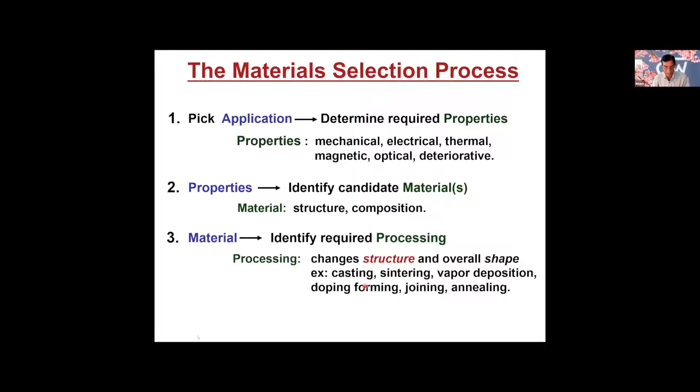One of the main features of the LENR experiment is that it depends on both the composition and the structure. But another interesting part of it is that the composition and structure may change during loading. So moving forward, we are going to introduce the fundamental concepts in material science. Again, it is a fairly large subject, so I don't envision going into all the details.

So looking at imperfection first. There is no such thing as a perfect crystal. What are these imperfections? Why are they important? Because many of the important properties of materials are due to the presence of imperfections. Defects may be desirable or undesirable. For example, dislocations may be good or bad, depending on whether plastic deformation is desirable or not.

Now I'm going to talk about different types of defects. You have defects of zero dimension, one dimension, which is dislocation, and then two dimension and three dimension. In zero dimension, we have vacancies, interstitials, substitutional. Then one dimension is dislocation. Then in two dimension we have grain boundaries or interfaces. Then in three dimension, we have voids, cracks, and inclusions.

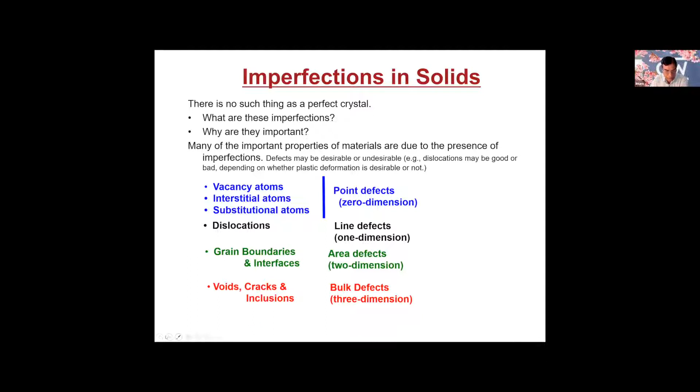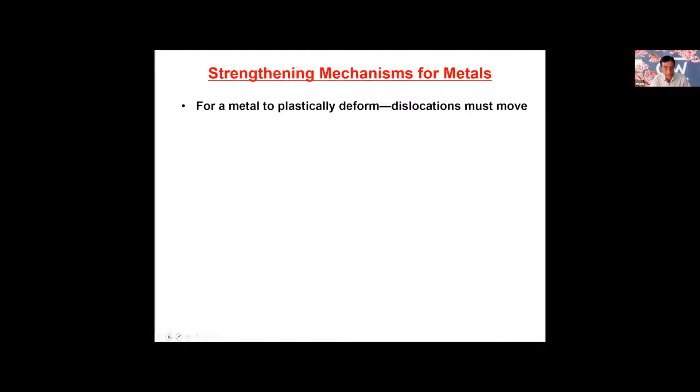Moving forward, let's talk about the different ways we can make the material stronger. Again, these are the fundamentals I'm going to touch base on, which may be useful down the road to make a selection of the material. For a metal to plastically deform, dislocations must move. That's the basic principle. So strength and hardness are related to the mobility of the dislocations. If you reduce the mobility, the metal becomes stronger or hardens, because a greater force is necessary to cause dislocations to move. And if you increase the dislocation mobility, the metal becomes weaker.

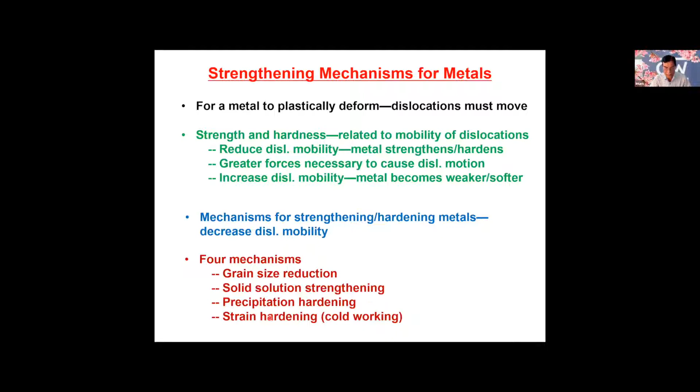And there are different ways you can increase the strength of the material: by reducing the grain size, by solid solution strengthening, precipitation hardening, and strain hardening. These are the different ways, and I'm not going to go into details of those.

So just giving you a rough idea where the diffusion will be faster and slower. If the structure is an open structure, it will be faster. Materials with secondary bonding, smaller diffusing atoms, low density, these make diffusion faster, and just the opposite to that will make diffusion slower.

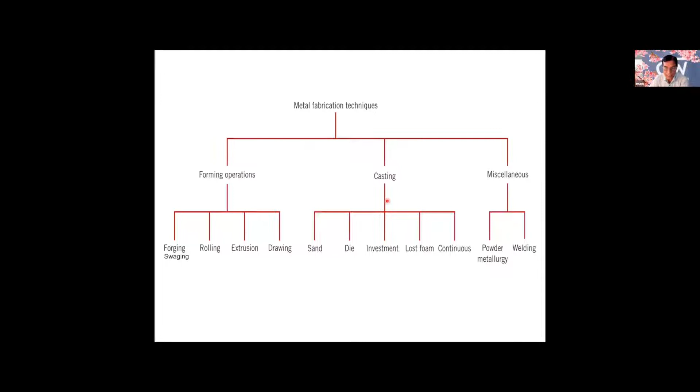Moving forward, these are the different ways by which metal can be fabricated. One is called forming operations, casting, and miscellaneous. And again, there are different categories of that, and I will touch base on some of them. So here are the different types of forming techniques. Here you have forging and swaging. This is rolling, this is extrusion and drawing. And again, each has its own properties to deal with once you go through the forming.

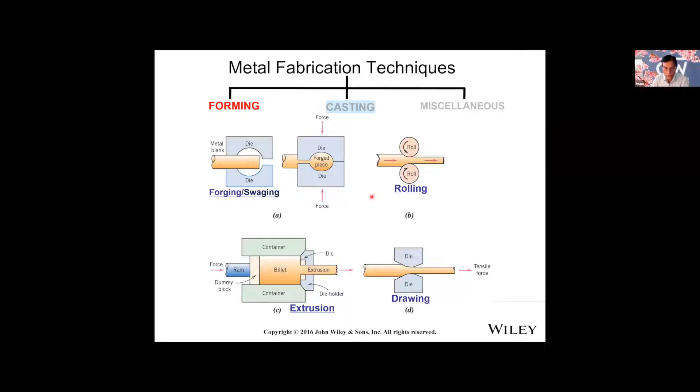Now, one thing I will mention is casting. So moving forward, in casting, it's interesting that casting is normally done by molten metal filled in a mold. So metal is melted in a furnace, perhaps alloying elements added, then cast into a mold. It is common and inexpensive. It gives good production of shapes. It's a weaker product. There are a lot of internal defects, and it's a good option for brittle materials. So normally you adopt it when the material is brittle.

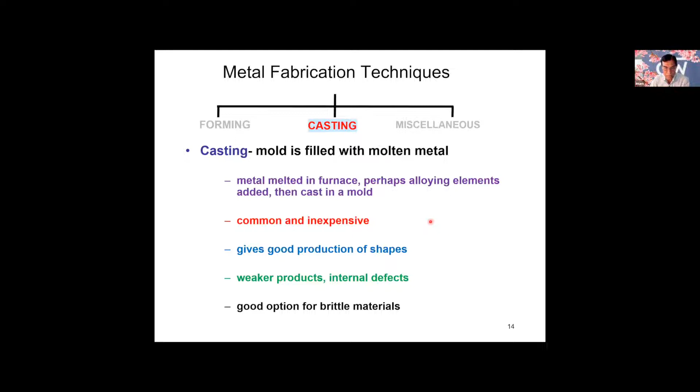But one thing is very interesting: when you do the casting, you cannot do further processing. The cast material is itself in equilibrium, and it doesn't want to change the structure. If you want to change the structure, then you have to do some forming, like we discussed before.

And then talking about the miscellaneous part of it, which is powder metallurgy and welding. So welding is very close to the structure which you get in casting. And powder metallurgy, again, is a fairly large subject, and I'm not going to go into details of that. And some of the aspects of powder metallurgy have been dealt with in our US patent, which was just issued last month.

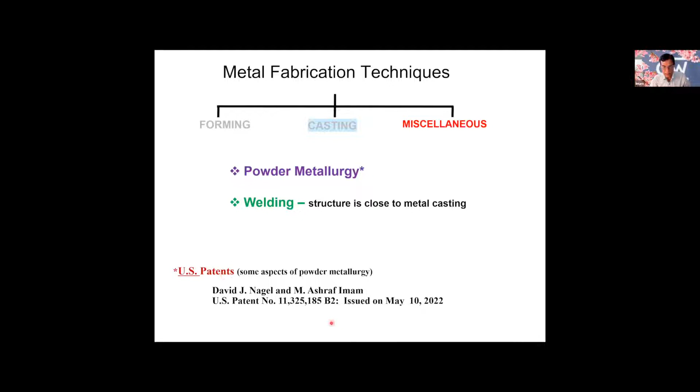So here are some of the characteristics or examples of structure, property, and processing. So here I gave an example of steel. If you just cool the steel at different rates, you are going to end up with different types of structure, and you can see the hardness also keeps on increasing.

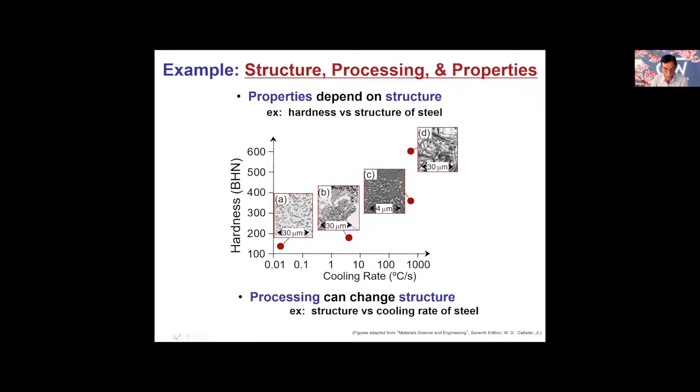So here are some of the properties from adding some impurity. If you look at that, this is pure copper. This is the resistivity we are talking about. And this is thermal conductivity. So here in this first graph, you can see that with the addition of nickel, the resistivity of the copper increases. Here with the composition of zinc, thermal conductivity goes down.

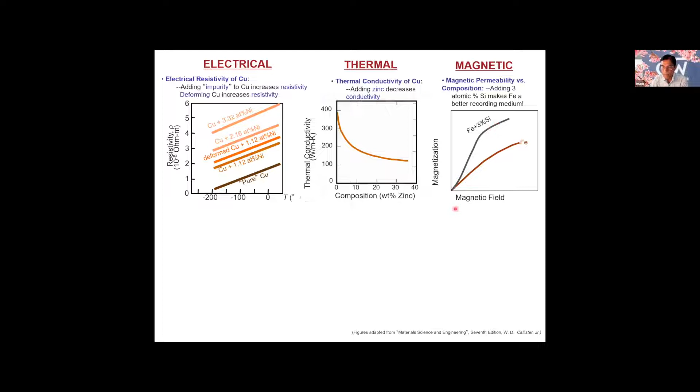Then here you have the magnetic field. So this is iron. When you add some silicon, you can see the changes in the magnetic field. If you look at some of the optical properties, all of them are aluminum oxide, but it has become transparent, translucent, and opaque, and it depends on the material structure. So if you change the material structure, you can go from transparent, to translucent, to opaque.

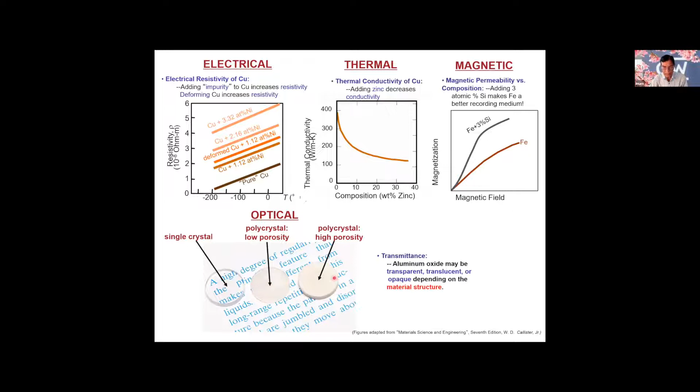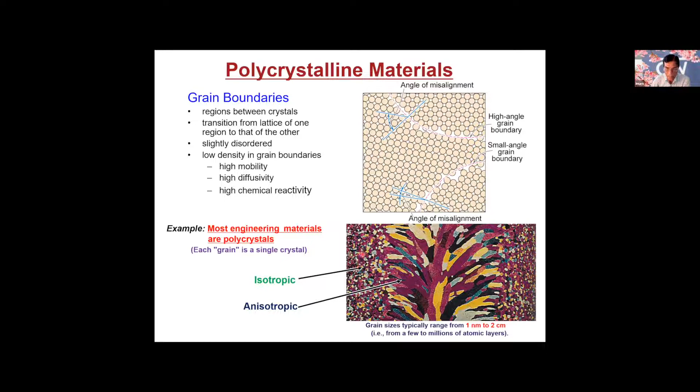So nanocrystalline, I think it has become very important, partly because it gives you the option to have a large surface area. So normally when we call it nanocrystalline material, we talk about 100 nanometers, and 1 nanometer is 10 to the minus 9 meter. So if it is less than 100 nanometers, we call it nanocrystalline material, and grain sizes are typically considered ultra-fine grains.

Now, the grain size of a nanocrystalline sample can be estimated by X-ray diffraction. The crystalline size can be measured directly using transmission electron microscopy. And if you compare those, nanocrystalline refers to the structure, a small piece of condensed matter, not necessarily individualized, and nanoparticles only refers to the size of a small individual solid. So sometimes people have a problem differentiating nanocrystals and nanoparticles.

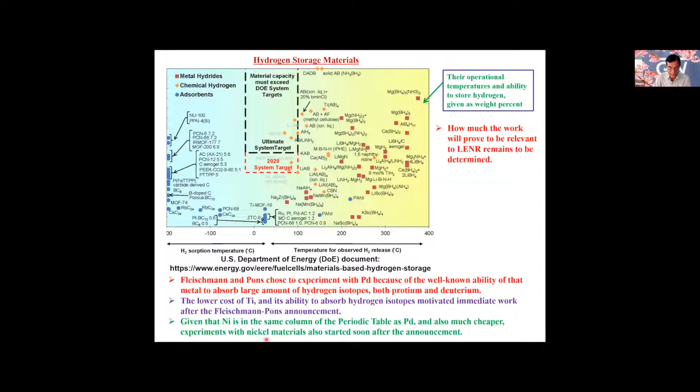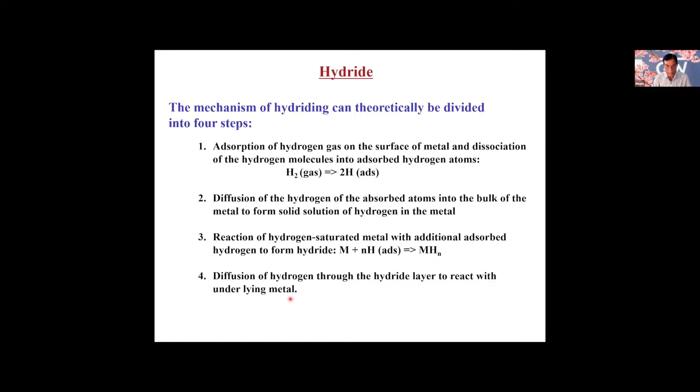So here are the different mechanisms one has to be familiar with for hydriding. Adsorption of hydrogen gas on the surface of metals and dissociation of the hydrogen molecules into adsorbed atoms. So when you have a gas, when it adsorbs, then you have atomic hydrogen. Diffusion of hydrogen and adsorbed atoms into the bulk of the metal to form a solid solution of hydrogen. If it is more, then it becomes a hydride. Diffusion of hydrogen through the hydride layers to react with the underlying metal. So these are the different mechanisms for hydriding.

Moving forward, this is the phase diagram of palladium hydrogen. And here you can see that this is the alpha phase here. This is a mixture of alpha and beta. This is beta phase. And alpha is the solution of hydrogen in the metal, and beta is the hydride.

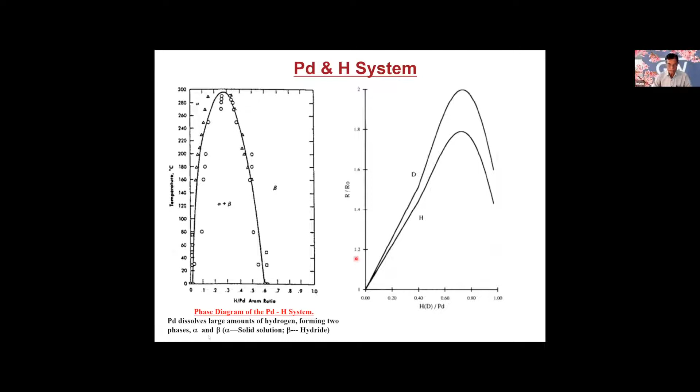And if you look at the resistance, which normally we measure in experiments, this is hydrogen going into the metal, palladium, and this is the deuterium. You can see the resistivity at this point, you have an inflection. So this will be helpful when we do this experimentation and make the measurement of the resistivity or resistance.

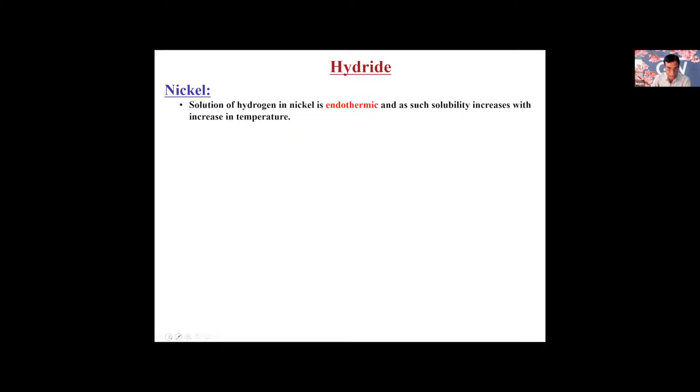Now moving forward to nickel, because nickel has become very important as a lot of positive results have come out. So one thing here is that nickel is endothermic. When hydrogen goes into it, it is endothermic, and solubility increases with temperature. And just to give you some idea about nickel here, you can see that the solubility is very, very small.

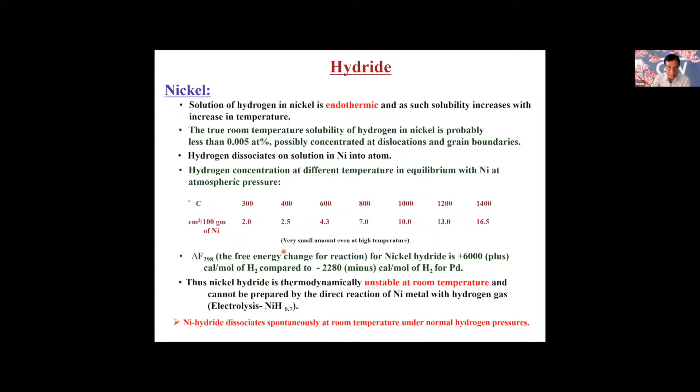So the main thing I wanted to mention here is that nickel hydride dissociates spontaneously at room temperature under normal hydrogen pressure. And the room temperature solubility is very low. So that's the main message I wanted to give here. So moving forward, if you look at the other challenges which we have, I'm going to talk now about materials issues.

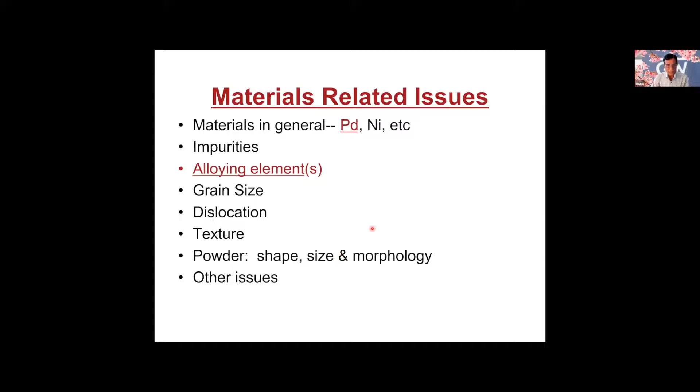So there are a lot of things here. The materials, as we mentioned, palladium, nickel, and we mentioned some of those things. The role of impurities, then alloying elements, grain size I discussed, dislocation, I mentioned texture also, I mentioned powder metallurgy part of it, and we'll touch base with other issues. But let me touch base with alloying elements, which is very important.

And what we did after the announcement, we started looking into different types of material, including palladium. So we looked at high purity palladium, commercial purity palladium, palladium silver alloys, because there was some potential thought about that, and then palladium boron, palladium cerium, and other alloys. But I will concentrate more on palladium boron alloys because that's where we got positive results.

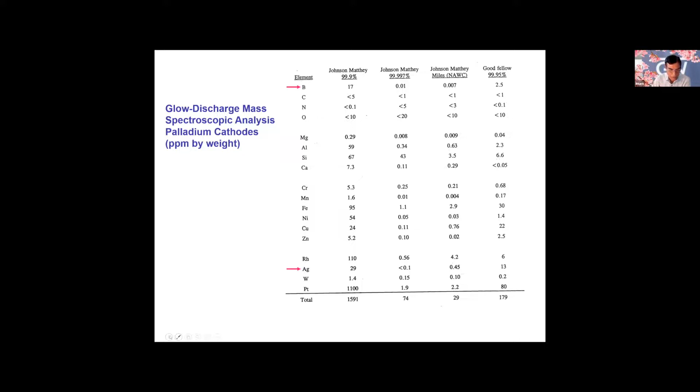So this is the glow discharge mass spectroscopy analysis, and we have taken Johnson-Matthey different purity content, and then we have got some NAWC Johnson-Matthey also, and then Goodfellow. So there's different types of palladium we got. And one interesting thing to see is that there's some level of boron here and some level of silver here. So we thought that maybe boron and silver and some other elements might be helpful to have the positive reaction in LENR experiments.

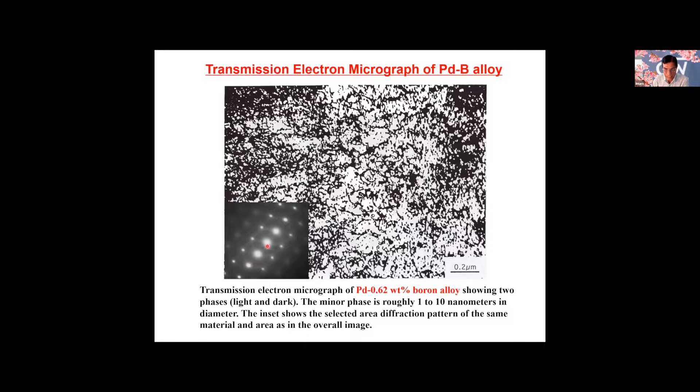So it may be hard to see, but the small dots are one phase, and then you have the matrix phase. The dots are roughly around 1 to 10 nanometers. And this one is a selected area diffraction pattern of the same material and area as in the overall image.

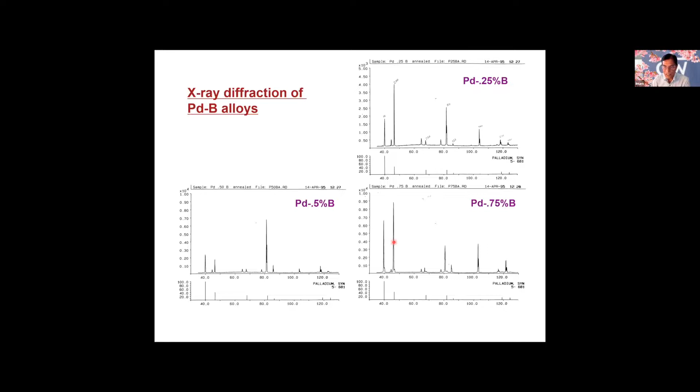So here is some X-ray work. This is 0.25 boron content. This is the pure palladium, and here is the 0.5, and here is the 0.75. So this gives you an indication that we have two phases. You can see this. This is the matrix lattice parameter.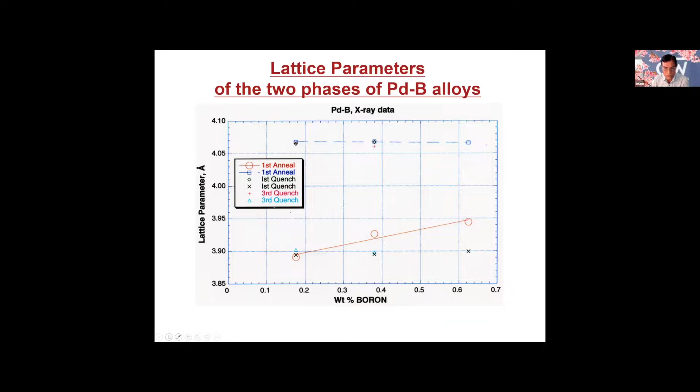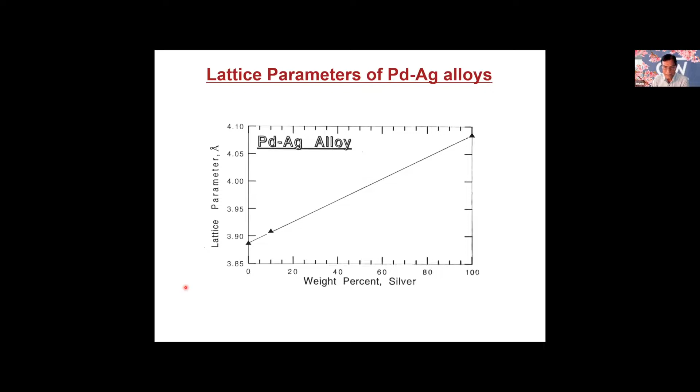And we made different types of alloys, with silver as well. So let me show you the palladium silver one. This is the palladium silver lattice parameter. If you increase the amount of silver, the lattice parameter increases, which is consistent with what we showed before.

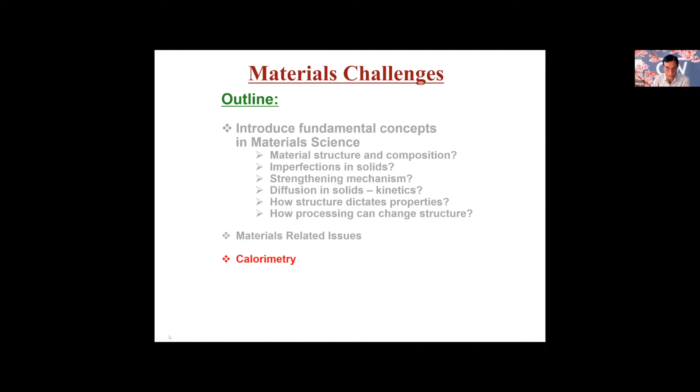Looking further, I'll show you some of the calorimetry work which was done, and then progress and the summary. So here is the calorimetry work, and you can see this is the NRL palladium. We didn't get any excess heat. This is the palladium cerium boron alloy, which we prepared, and we also didn't get any. This is time here, and this is excess heat here.

This one here is palladium silver. Again, we didn't get excess heat. So for all these materials, we did calorimetry to find out whether excess heat comes or not, but we didn't find any in any of these alloys or palladium.

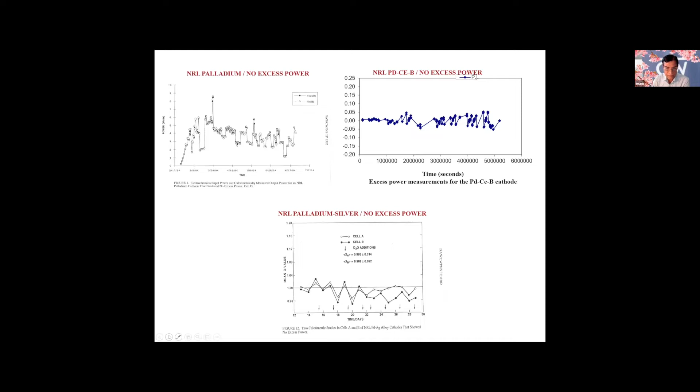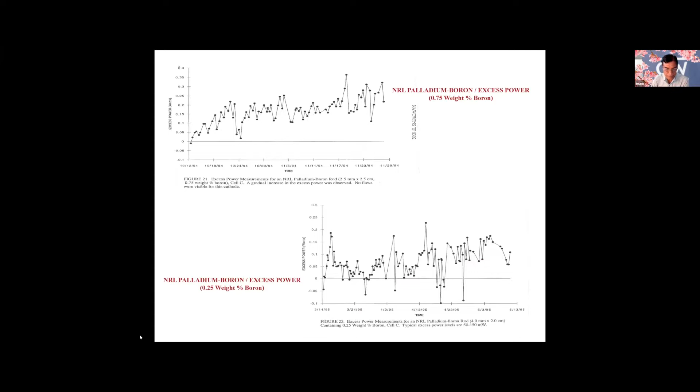And this is for palladium boron, and I'm giving it for 0.75. Again, this was aimed at 0.75, but we ended up with 0.62 boron content. And you can see the excess heat here. And here is for 0.25 boron, and again, you can see the excess heat there. And we sent some samples to Dr. Storms also, and he also got positive results.

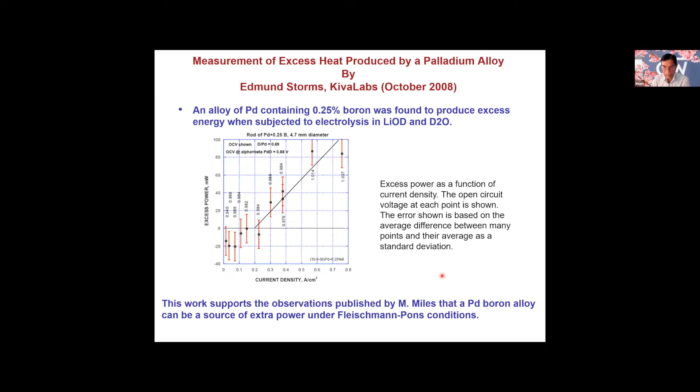So just to wrap up what we have seen so far: the 3 different compositions of palladium boron samples produce excess power in China Lake studies. All these alloys have 2 FCC phases, as I mentioned before, with different lattice parameters. And excess power appears early in the experiment with the palladium boron alloys. That's another good part. Palladium silver and palladium boron cerium failed to produce any excess heat.

Storms reported excess power in 0.25 palladium boron alloys using a closed system. And recently, Professor Zhang also found excess power in a palladium boron alloy supplied by Mel Miles. It is important to understand the relationship between properties, structure, and processing.

Materials can be single crystal or polycrystal, but sometimes the preference is to have a single crystal, because then you can pinpoint some of the effects more easily. Material properties vary with single crystal orientation, which is what we call anisotropic. And in a polycrystal, with randomly oriented grains, properties are isotropic, as I mentioned before. Nanocrystalline materials offer advantages because of the surface area.